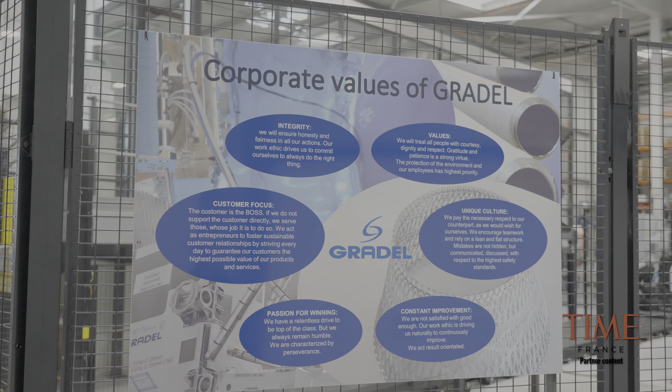My name is Claude Marc. I'm the CEO of GRADEL.

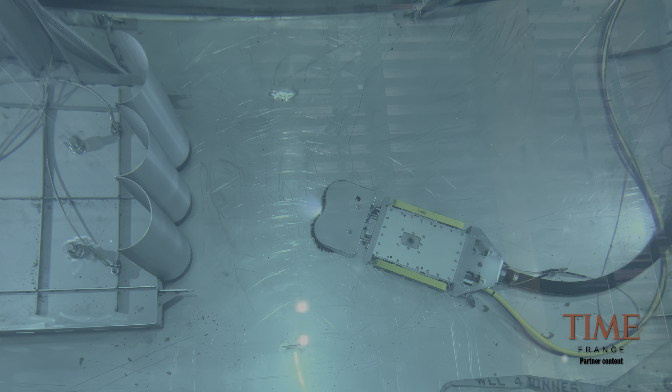GRADEL has existed since 1965 and we started in the nuclear business. In nuclear business we make maintenance equipment for cleaning nuclear power plants. We used that knowledge with the engineering office to diversify into businesses in the glass market for sputtering targets.

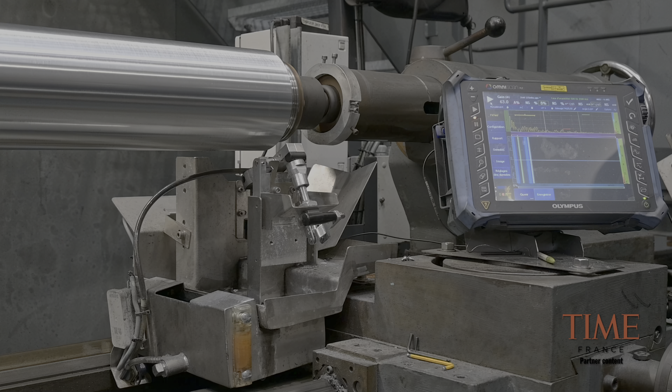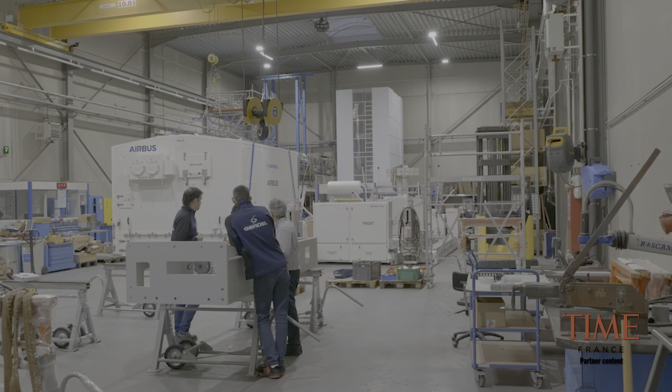With a patented process we have industrialized over time. Since 2010, we moved into the space market with mechanical ground support equipment, where we developed a full portfolio of handling and transport equipment. Starting from that, we have now developed a new technology for lightweight applications.

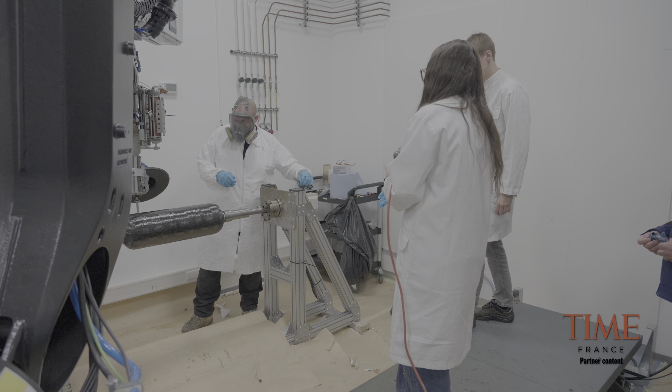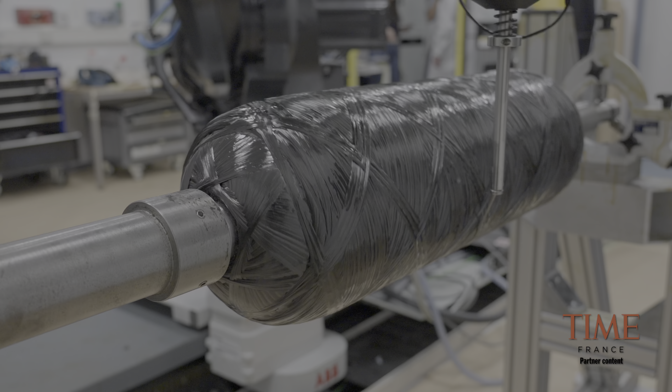We started in 2020 to develop a new endless filament winding technology which we commercialize under the brand name GRAM. GRAM stands for GRADEL Robotic Additive Manufacturing. It's an endless filament winding process where we take off-the-shelf fibers and impregnate them on an applicator developed on our own, which is now patented.

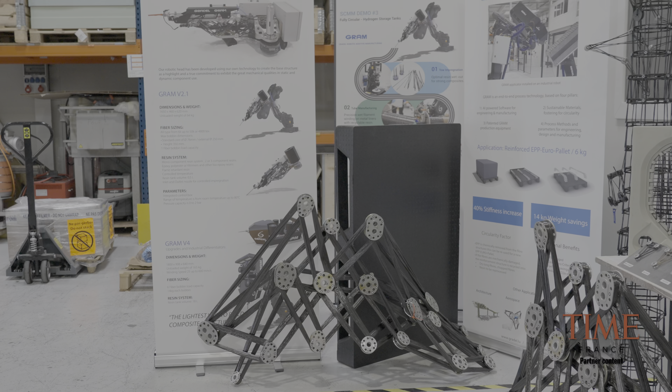This technology enables weight savings up to 70% and we use 80% less material. Half the mass needs half the energy to accelerate it or to lift it up into the sky.

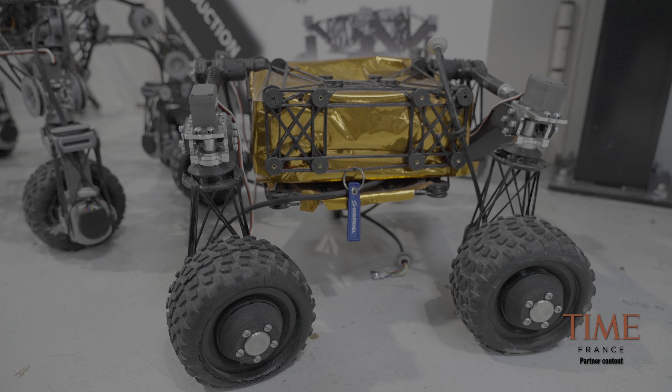That's why GRAM makes the most sense in everything which is flying, like drones, satellites, aircraft, and urban air mobility. All these topics really benefit from lightweight solutions. That's why we position ourselves in the aerospace and defense market.

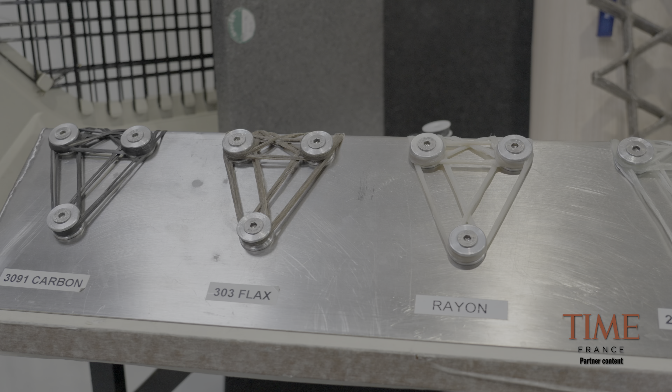We have recently signed a contract for a military satellite where we are supposed to deliver 10 parts. This gives us flight heritage by end of 2028. That's an important milestone for convincing our customers to come with us.

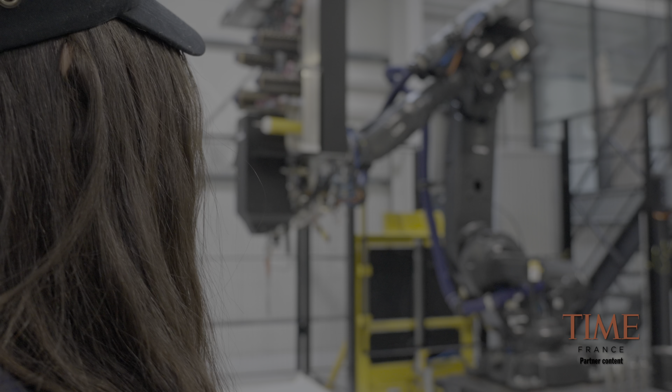We will start in beginning of 2027 production with low-hanging fruit components like structures for drones or substructures for PV panels. That's how we start to industrialize.

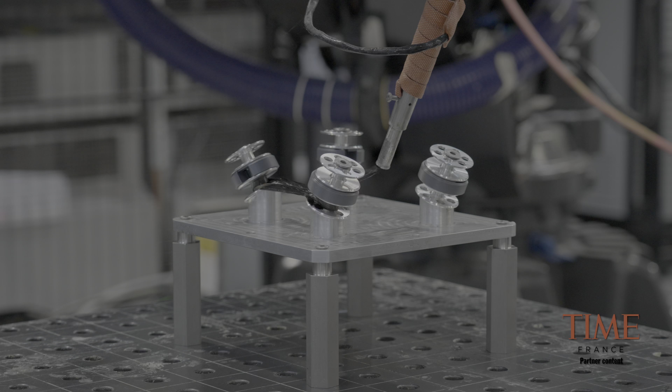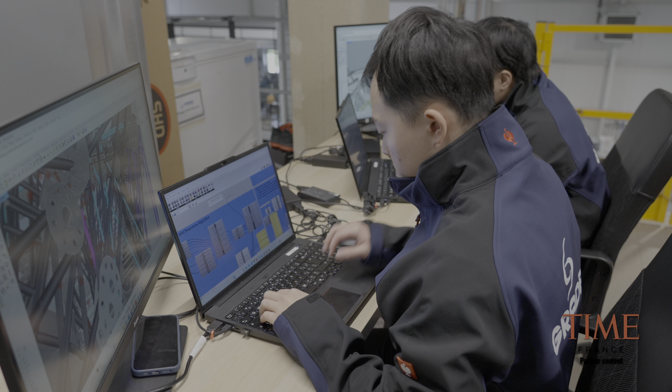We offer product manufacturing for customers who don't have the series volume to justify investing in winding equipment. But for those with the quantities to manufacture on their own, we sell whole projects. We do the proof of concept, pre-series, and we sell the winding equipment, including services, maintenance, and consumables.

We will also provide engineering services or software dedicated to engineering, or production services, to our customers.

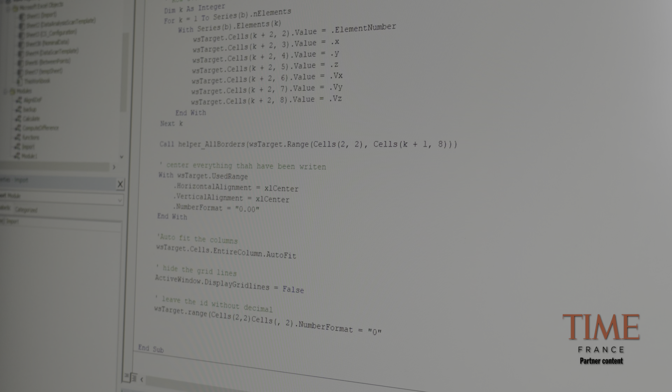My name is Nico Janot. I'm R&D manager at GRADEL Lightweight.

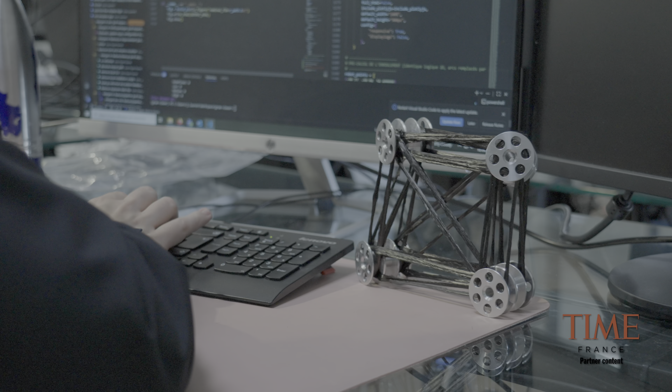My first responsibility is, with my team of calculation and design engineers, to design the GRAM structures. We are also in charge of developing the tooling used for the robotic winding process. My second responsibility is to coordinate development and continuous improvement across the material, design and robotic departments.

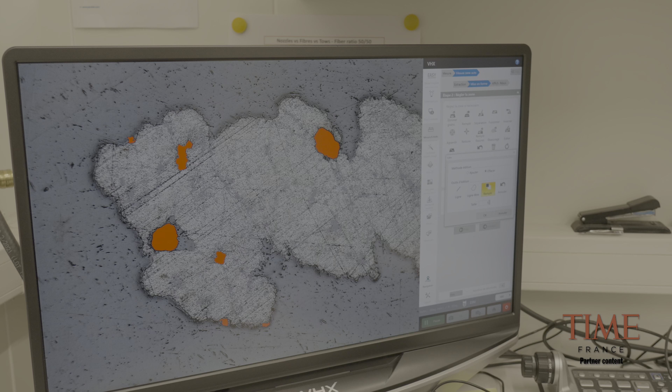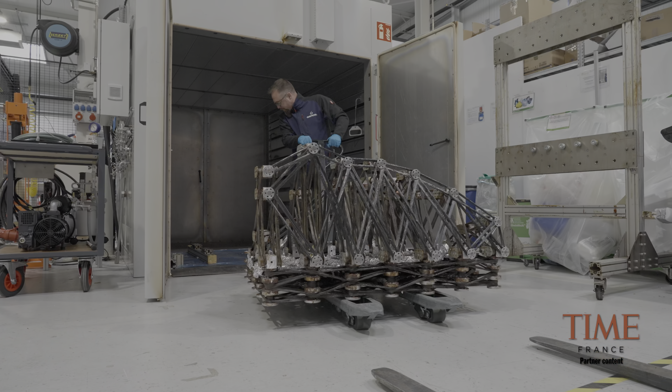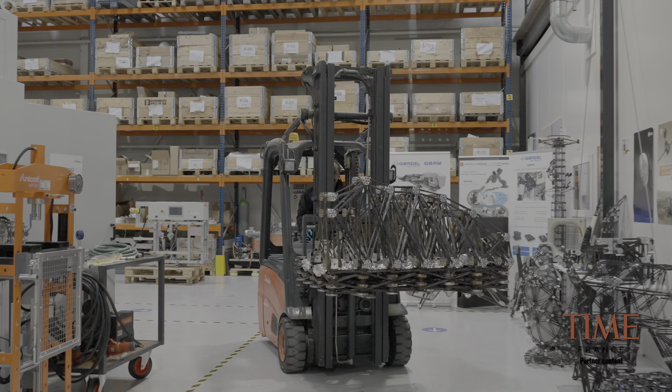On the design side, we are working on space structures for the space industry, where we have to meet strict requirements and keep the mass as low as possible. These projects are a nice opportunity for us to optimize our process from development to manufacturing, to perform multiple tests for qualification, to correlate our model and increase our knowledge.

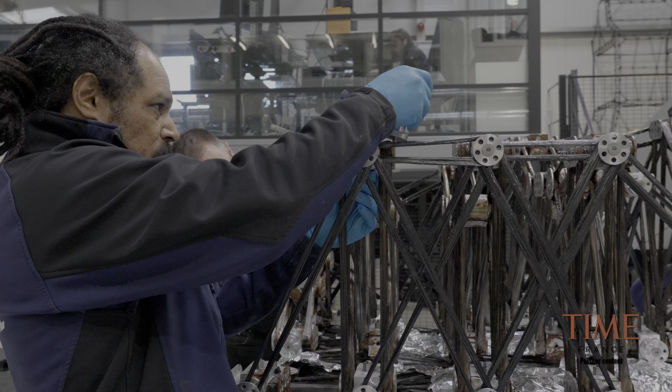Hello, my name is Hind Saladi. I'm a robotic engineer at GRADEL Lightweight. I work on robot programming, simulation and trajectory development for automatic manufacturing processes.

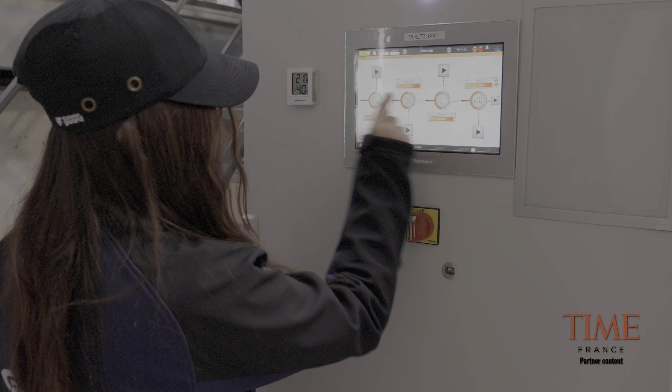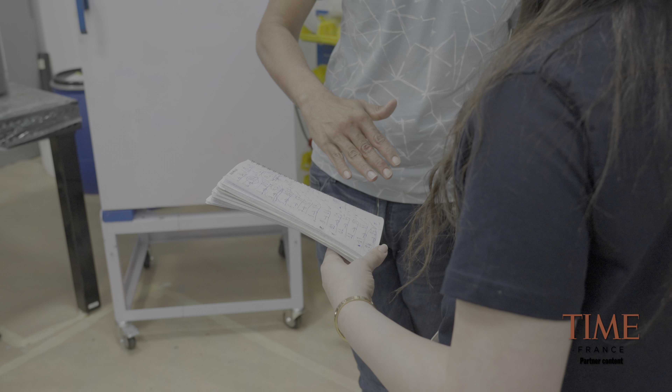We start with the digital design, but the robot cannot understand it directly. So my role is to translate this design into movement, logic and instructions the robot can execute. In practice, as a robotician, we generate trajectories, define the winding path, and create the code automatically.

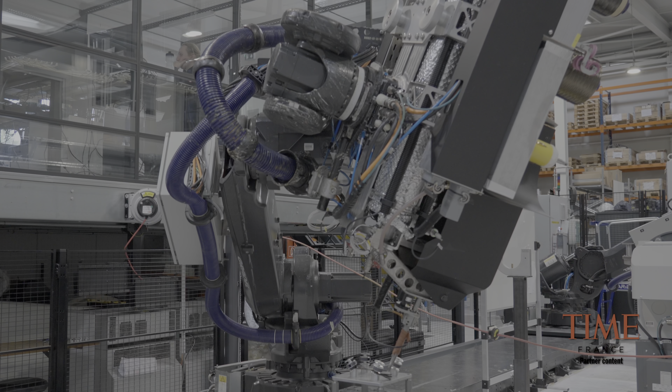Then we test everything first in simulation and then validate it in real production. Our role is to make sure the robot can build what was designed correctly, using AI technologies to make the process more efficient and safer.

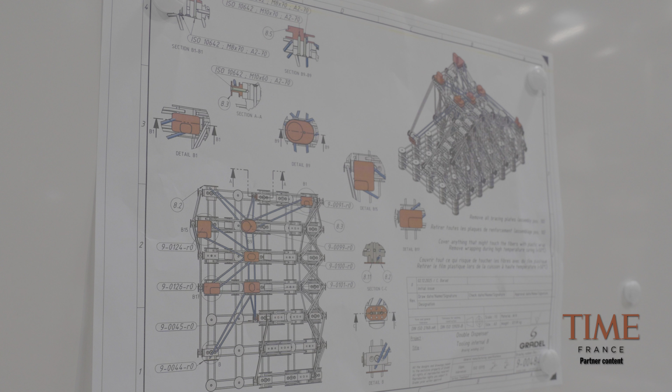Our objective is to decrease non-recurring costs by a factor of 5 to 10. Our strength is that we have shown multiple times that we can industrialize projects from an idea up to a finished product. We showed that in nuclear, in the glass market, we did it recently in space, and now we are ready to do that for the GRAM technology.

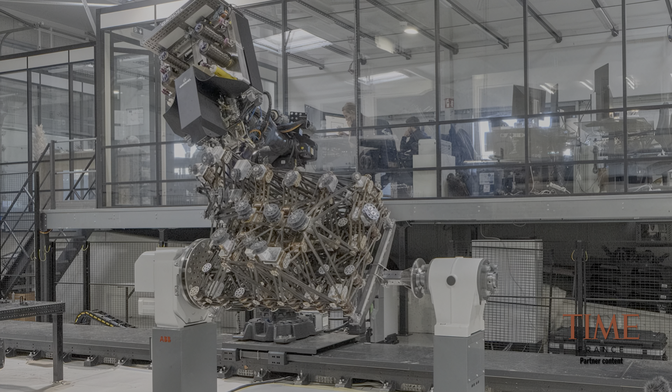GRAM is a patented process technology. It is very versatile, we can go from large structures to small ones. We achieve weight savings and 80% less resource use. It is really the right technology for the right time.

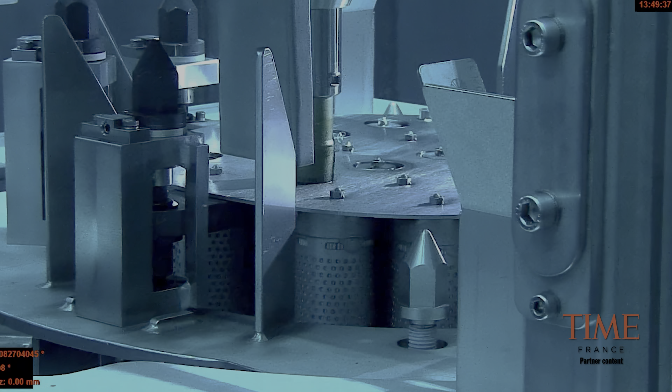GRADEL as a group is excellently positioned regarding the geopolitical situation worldwide. We have nuclear with a renaissance, the glass market is really growing, and satellite and defense have all-time high budgets at the moment, and this is where we focus. Lightweight matters, especially in that latter one.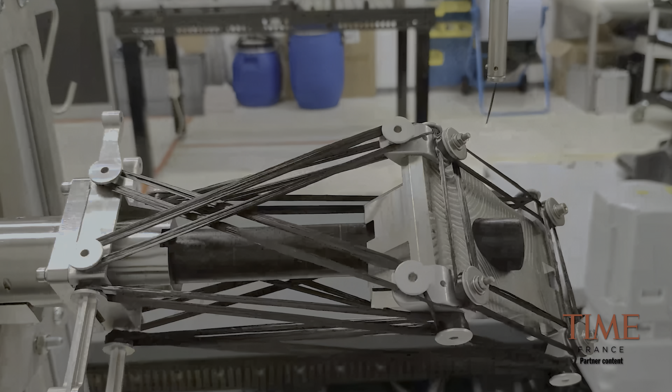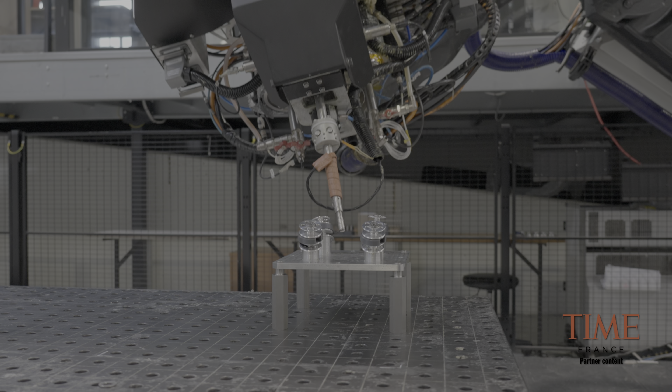GRADEL has innovation in its DNA. We have demonstrated multiple times our capacity to industrialize ideas and work in a very customer-oriented way. Our portfolio of technologies is unique and sometimes even an enabler. We help our customers move to the next level.